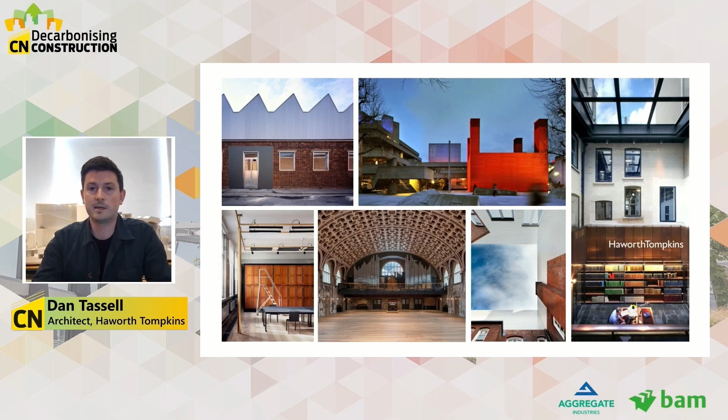For us, this is a process of creative adaptation and reinvention, whether at the Royal College of Art, where we transformed a former bus garage into a painting school, the London Library, where a new reading room was slotted into an underutilised light well, or Battersea Arts Centre, where a new grand hall was formed in the burnt-out shell of the old. In each case, we're interested in working with the raw material of the existing, whilst adding new layers that enrich the original and allow the building to meet and adapt to the needs and expectations of users for years to come.

This adaptability is a very important aspect of creating long-lasting, sustainable architecture. The project's been delivered at a time when universities are facing up to the enormous challenge of decarbonisation. If the last 10 years have been defined by bold new buildings, I'd like to think the next 10 years will be defined by the creative adaptation of existing estates.

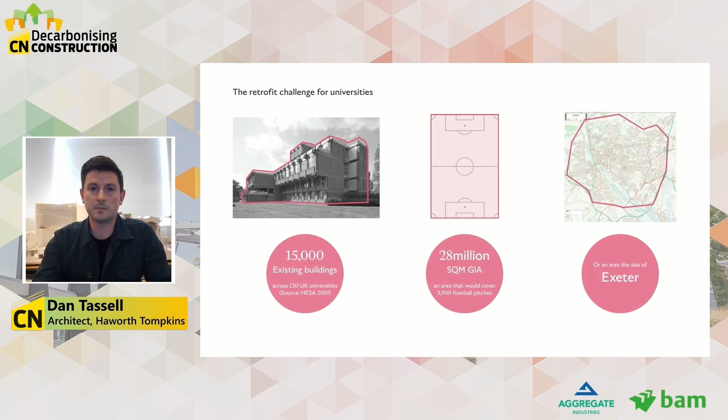The scale of this challenge is plain to see. Universities in this country have over 15,000 existing buildings spanning 28 million square metres, the equivalent size of the city of Exeter. Over the next 10 years, many of these buildings will require at least some level of intervention - fabric upgrades, insulation, ventilation, new heat pumps and so on - if universities are to meet the ambitious targets they are setting for themselves.

At the same time, students are demanding more from their institutions, making sustainability a key consideration when deciding where to study and pushing universities to put in place plans for action. The economic arguments for retrofit are equally as pressing, and failure to take action will mean existing buildings become stranded assets as the cost of carbon increases through economic forces and government policy.

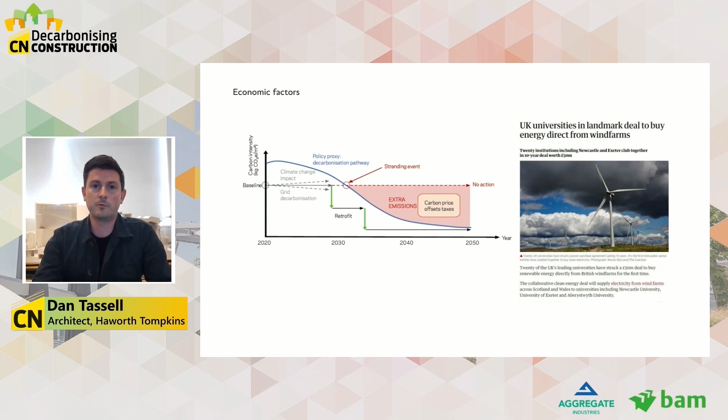It's within this wider context that we started to have conversations with Kingston University in 2016 about how we could use this project to demonstrate how retrofit can not only deliver practical benefits and energy savings, but can act as a catalyst for change.

Kingston School of Art are recognised as one of the leading institutions for art and design teaching and research in the UK, and the project brief was to deliver around 10,000 square metres of studios and workshops for architecture, design and creative industries courses.

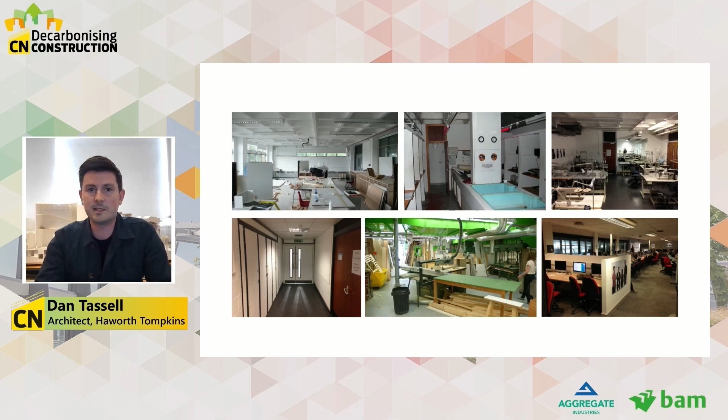However, environmental conditions in the building were very poor. It would overheat in the summer, it was cold in the winter, it had poor internal air quality and dust contamination in the workshops, and excessive energy use as well. The quality of the internal spaces was also compromised, with poor access to daylight, lots of dark internal corridors, low suspended ceilings, and a highly confusing layout.

So why retrofit? At master plan stage, we explored a number of options, including the full demolition and rebuild of the building. However, by making the most of the existing structure, we were able to reutilize the significant embodied carbon already contained within the frame and within the masonry. Through careful phasing and sequencing, we were also able to avoid a full decant of the building, which allowed us to keep vital workshop facilities in use throughout the works.

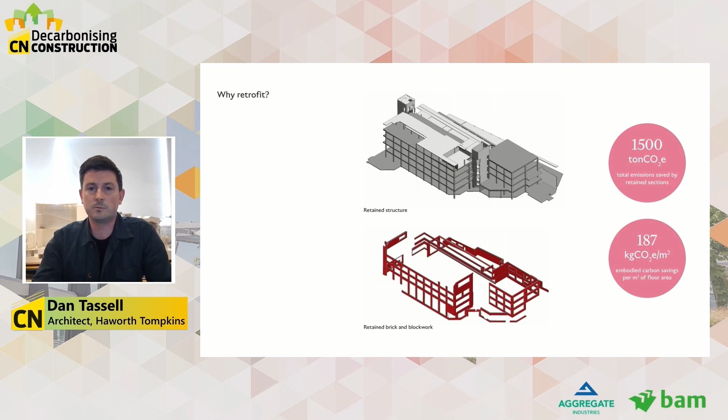Embodied carbon was obviously an important consideration, but it was by no means the only one. Achieving a BREEAM outstanding rating required close collaboration between the client, the design team, and the contractor to develop a really holistic approach that provided a full package of sustainability upgrades. This included fabric improvements, window replacements, and insulation, all delivered hand in hand with good ventilation.

Waste during the construction was reused on site where possible, most notably by students in the workshops on site for their own projects.

Adaptability to climate change was also a key driver. We're right by the river, so water runoff into the river was attenuated to reduce flooding. And because the building is in a flood zone, we used flood resistant materials on the ground floor as well, so that when the building does flood, or if it floods, it can be easily refurbished.

Biodiversity was enhanced as well through extensive areas of green roof, and there are a whole host of other measures implemented across the building.

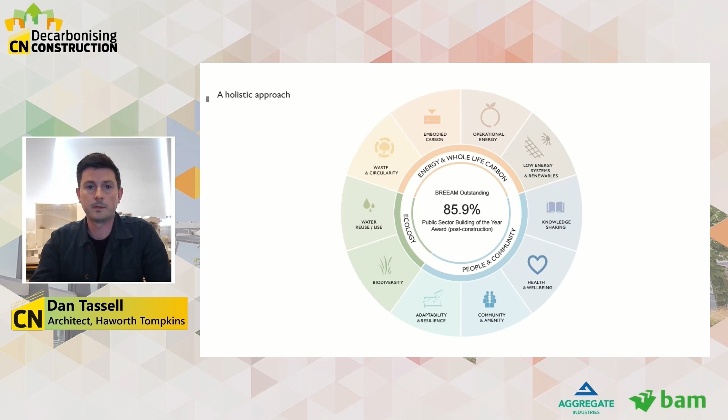We introduced large areas of green roofs and roof terraces. The roof terraces were linked to design studios, improving access to fresh air for students, whilst the 800 square meters or so of green roofs provide the biodiversity enhancements and the rainwater attenuation that I referred to before.

Another significant change to the building was extending the lift and stair towers up to the top of the building. Previously, they terminated at the fourth floor, but we extended them up to provide access to the fifth floor. Previously, it was very hard to get onto the fifth floor, and it was effectively not being put to use.

Through these kinds of measures, we were able to increase the efficiency of the building, providing about 20% additional usable floor area without actually extending the footprint or GIA significantly. This improved efficiency obviously delivers better value for the university and more usable floor space from their existing building stock.

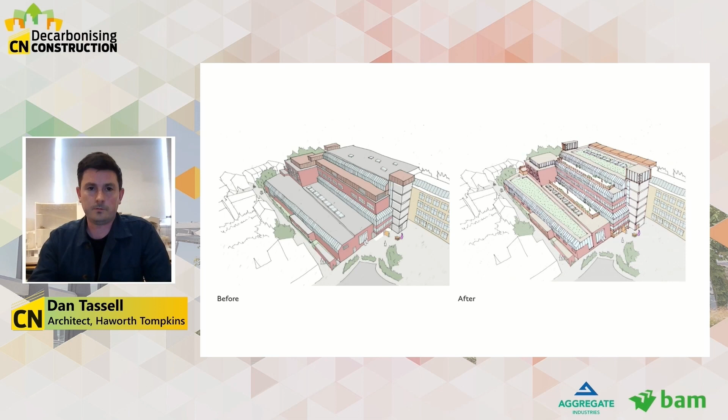This diagram shows the same corner of the building, just from a slightly different angle, to give a slightly different view of how those different measures came together.

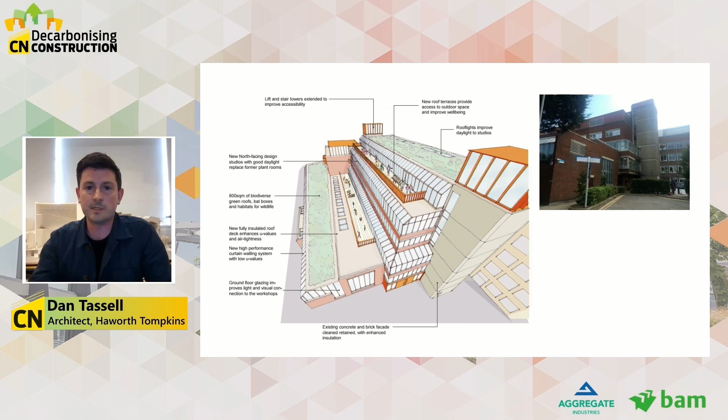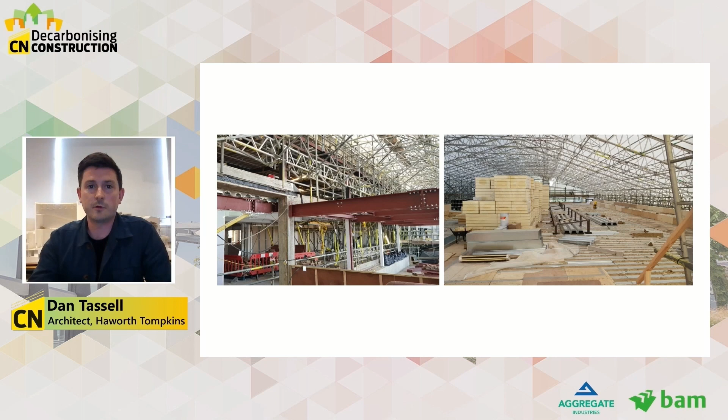Another key point to add is that the roof was fully replaced with a new highly insulated roof deck. These images show the scale of the temporary roof required to keep the building dry and to keep it operational during the roof replacement works.

We also integrated bat boxes. The river serves as a bat corridor, so it was important to provide habitats for the bats.

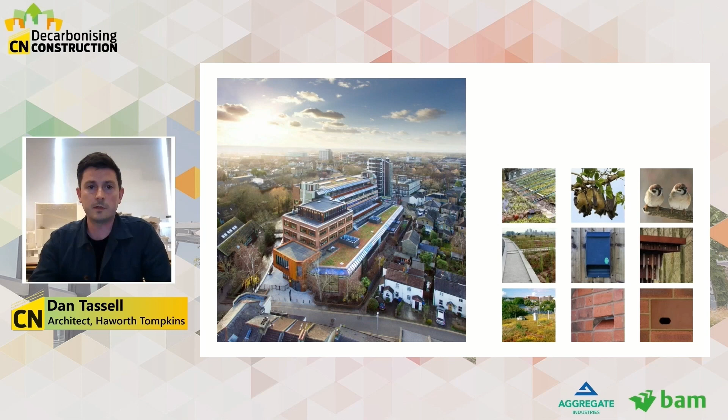And flipping around to the southern elevation, here the main issue to address was overheating. We undertook thermal modelling, which identified the need for a degree of solar shading to reduce peak summer gains.

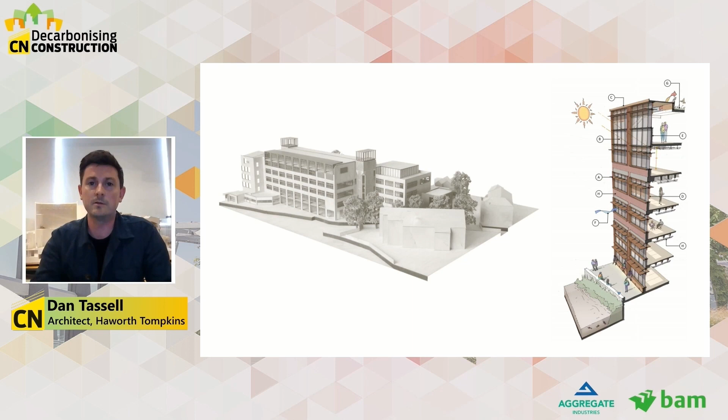On the 5th floor, we introduced new vertical clear-story glazing to replace slope glazing that was there before, and you can just about see the crank beam of the previous glazing line in the diagram on the right-hand side. The glazing previously was set at a sort of 60-degree south-facing angle, so in the summer months, when the sun was at a similar angle, it really did act like a greenhouse.

And the insulated walls were supported by a sort of mixed mode ventilation. So we have openable windows for summer ventilation, but also backed up by MVHR to ensure that we get the right level of air circulating all year round.

The rust orange metal was chosen for its tonal similarity to the building's aged bricks, and also for its raw sculptural quality. It was a favoured material of the likes of Anthony Caro and also the head of workshops, Richard Trupp, who was closely involved with the project throughout.

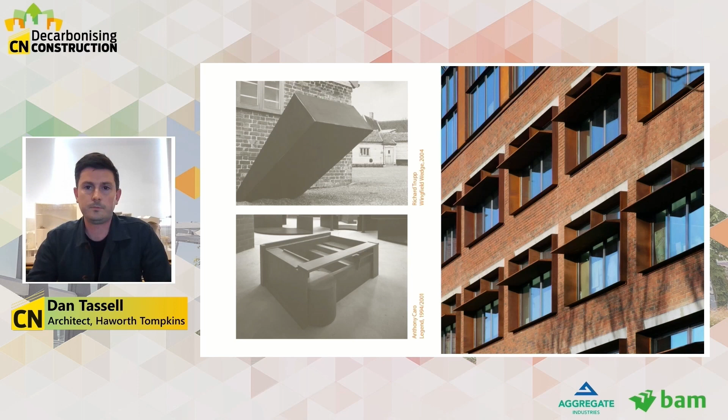It's really a kind of an echo of the artistic production taking place inside the workshops. We're also keen that any new additions to the building should feel as though they could have been made in the workshops. This is apparent in the facade elements, as well as things like ply furniture that we designed internally. In each case, they're defined by sort of functional detailing and craftsmanship.

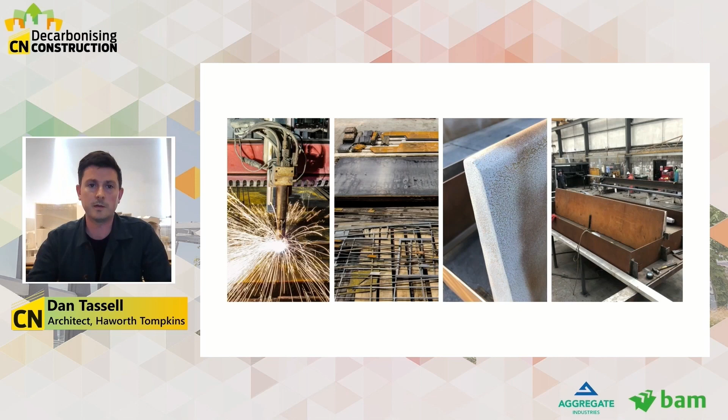The raw industrial qualities of the original building are complemented and amplified by these new additions to create a kind of riverside art factory for creative production.

What this really allowed is for a new public space to be created, a new entrance onto Mill Street, and to open up access to the river for local residents for the first time.

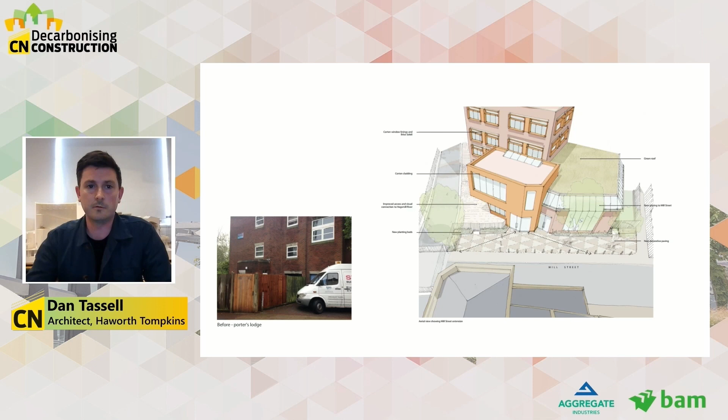Here we see how the new extension and entrance connect into the existing building in the left-hand image. The public realm extends around that building and all the way along the riverfront, creating a new continuous route through the campus. In multiple areas as well, we extended glazing of the existing building down to street level to act as a series of shop windows, opening up views into the workshops from the street.

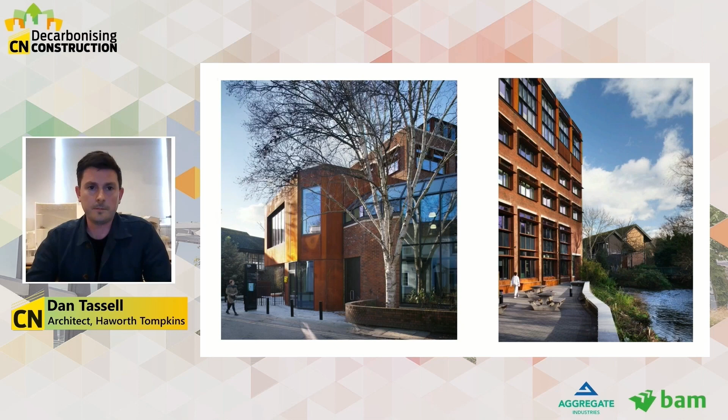Benches were also integrated in the south-facing glazed portals, and this provided a place to sit and contemplate alongside the river.

So, moving on to the building interior, a significant portion of the redesign was devoted to a much-needed untangling and rethinking about how space was used in the school.

At the top of the building, there are 4 floors of adaptable design studios for graphic design, architecture, and product design. All of these have good access to daylight. The lower 2 floors are dedicated to open access workshops, with 3D production on ground floor and 2D image-based production on first floor. These were linked by new stairs and lifts.

The ground and first floor plans are much deeper, so we clustered dark spaces such as film studios, edit suites, and photo edit spaces in the middle of the plan. This allowed spaces such as letterpress and printmaking to be positioned in areas with good daylight at the edges of the building.

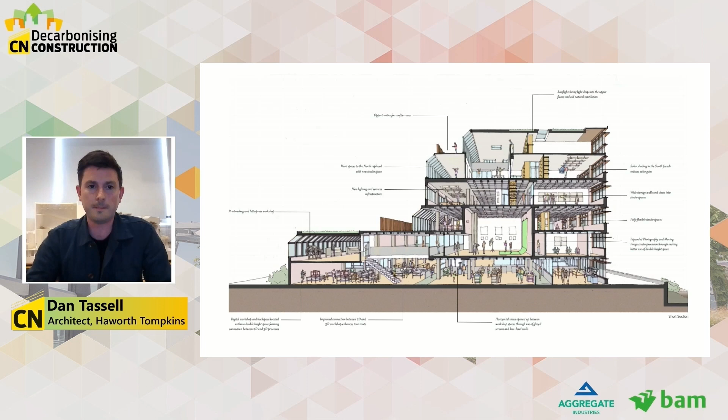These pictures show the large double height spaces at the centre of the building on first floor, which have very little access to daylight, being converted into 4 film and photography studios. It's important to note this is actually above the wood workshop, so acoustic design was critical for the success of these spaces, and we used a box-in-box construction and a new floating slab, which provides separation from the workshops below.

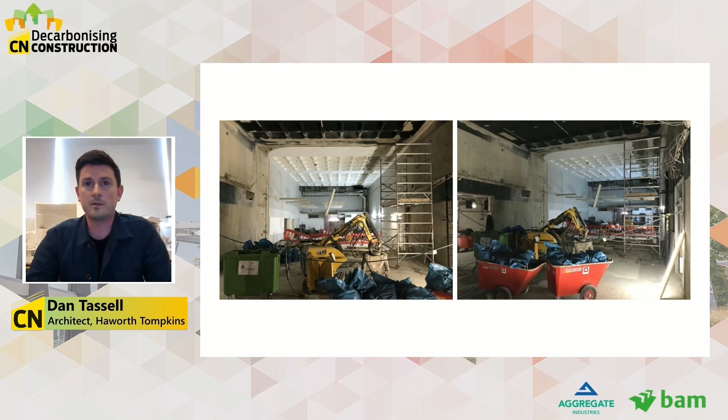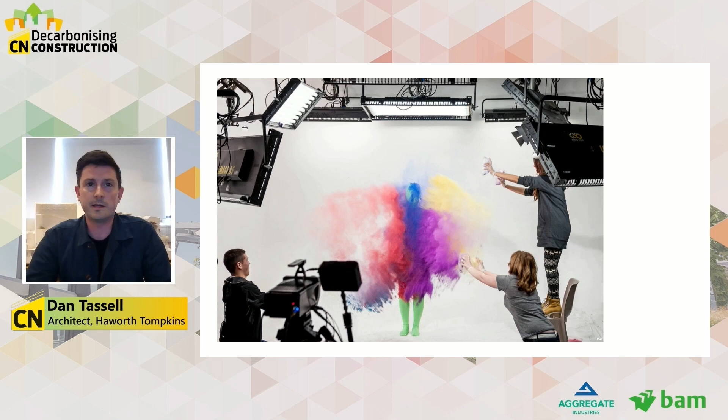And this is one of the completed film studios in use, with pantographic lighting and a double height infinity cove as well.

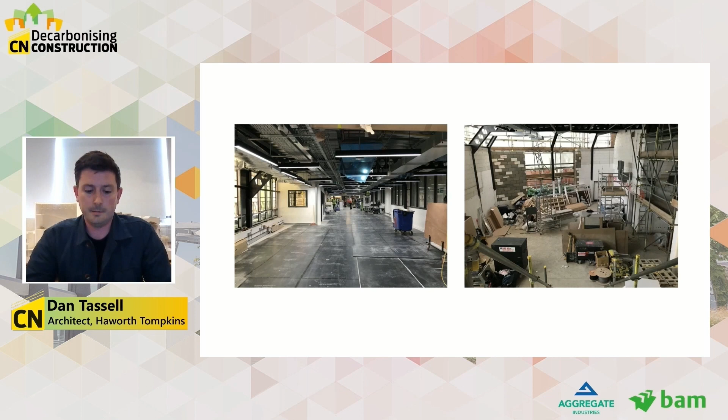Moving on to the printmaking and big build spaces. Again, these are construction shots and completed shots here. The letterpress workshop on the corner of the building occupies the location of what was previously a windowless plant space. This is an example of trying to get daylight to the parts of the building that can offer it.

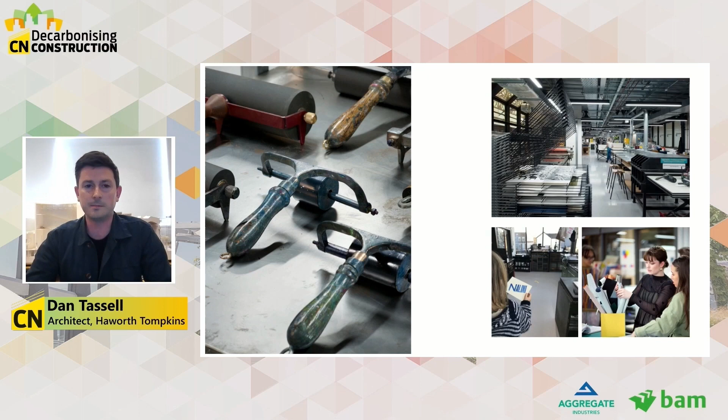The ground floor workshops include a range of processes, including woodwork, metalwork, stone carving, ceramics, metal forge, and foundry. There are a whole host of technical coordination challenges, including specialist lighting, hot processes, local extract ventilation, compressed air lines, and so on. The floor had to be completely refurbished over the summer months, with some 200 machines moved off-site and a temporary workshop put in place for the summer. It was all reinstated in time for inductions in October, which was a major logistical undertaking.

On the upper floors, adaptability was key, and design studios were designed as flexible, repeatable modules to allow courses to expand and contract depending on demand. Each studio can split into smaller units with movable pinboards and storage units that can be wheeled in and out from one studio to the other.

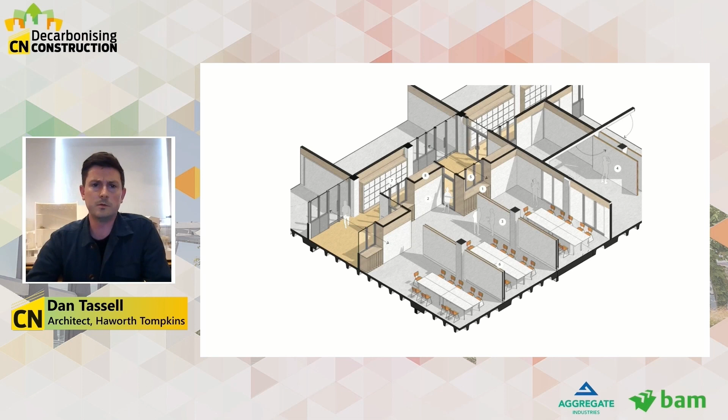Visibility was also important, with views in and out of all the studios. This shows a typical studio on completion, and you can see the flexible service infrastructure includes power modules hung from the ceiling, a sink off to the left in each studio, and ventilation that can support the space being subdivided.

Each department has the scope to adapt their space to suit their specific needs. This shows product design using the space both for design and for prototyping. The design studios have become places of making as well as drawing.

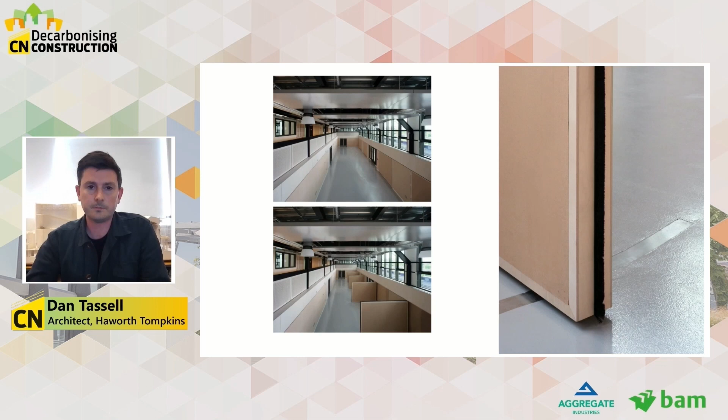On level 4 and 5, there's a large double height space linking the architecture department, with big fold-out walls which increase the amount of pin-up space. This has started to feel like a kind of wonderful, lively town square, and it's used for crits, evening lectures, and large-scale fabrications and model making.

The university is undertaking a full post-occupancy evaluation, looking at energy performance on a more granular level, as well as undertaking building user surveys, and we look forward to seeing the full report when it's ready.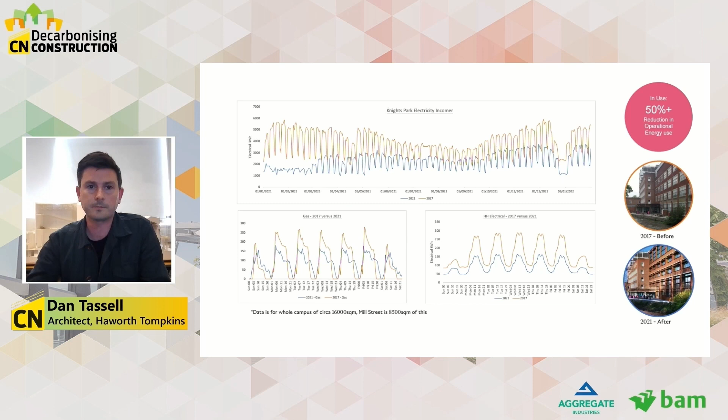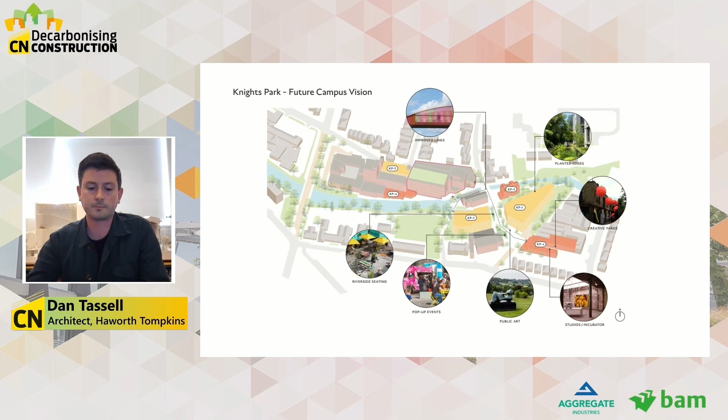At the beginning, I talked about the project acting as a catalyst, and we've also gone on to design a master plan that puts the Mill Street building front and centre. The new Mill Street entrance faces an expanded campus south of the Hogsmill River, and this includes ambitious plans to create new public spaces, enhance biodiversity, and decarbonise the heating systems. The vision also includes a riverside public square linked to new buildings and repurposed industrial spaces, with the idea of creating a sustainable and thriving creative campus.

The project has also served as a catalyst for wider discussions around sustainability within the university. Through our ongoing relationship with Kingston, we've delivered several smaller retrofit projects, given talks to staff and students on regenerative design, and contributed to a forward-thinking sustainability away day. We've really enjoyed feeding into these wider discussions around the pathways to decarbonisation.

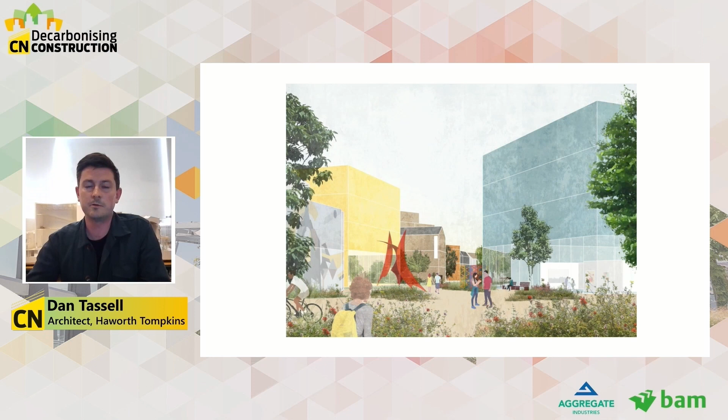In that respect, I think it's really helped to engage the imagination of the university. There's a great sense of engagement with the issues and an urgency to address them, and we look forward to collaborating with Kingston as they continue on this journey.

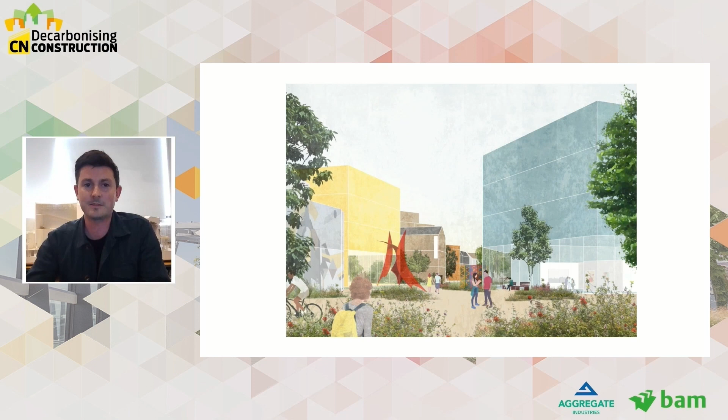Dan, welcome, and thanks for that presentation. What a fantastic project to have worked on. We were just chatting before we came on air. I know that site well - in a previous role I visited the School of Art and the Landscape School in Kingston, and it's a fantastic setting along the river there, with parks all round. Really interesting site, and I can see the enhancement you've made there to embed sustainability through the design. How did you find that in the project?

Thanks for having me. It's an interesting one - we were commissioned originally to do the master plan for the site, and as I touched on in the presentation, we looked at a whole range of options, including whether to demolish large areas and start again, or whether to work with what's there. It's quite a unique setting for an art school - certainly in the context of London, it's very peaceful, by the river, and encourages a very focused way of working. Aside from the environmental performance of the buildings, they were actually very successful as creative spaces.